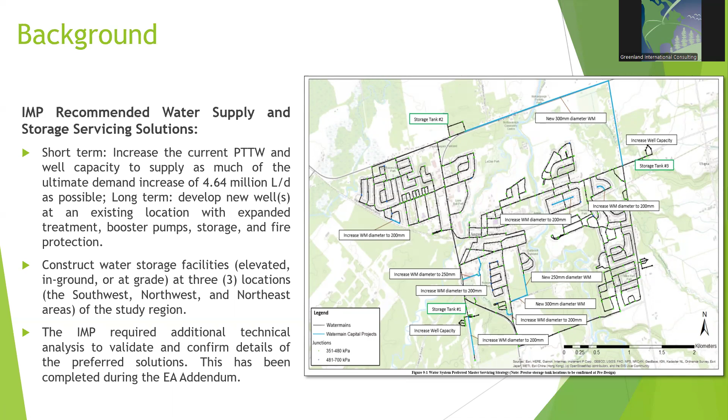Okay, so the IMP required some additional technical analysis to validate and confirm the details of the preferred solutions. So this was the main purpose of the addendum. So again, we're trying to prioritize and validate the water supply and storage strategies to address the immediate growth demands in Angus. And throughout this study, we revisited and reevaluated the IMP water supply and storage solutions by incorporating new data, field studies, and concept designs to help facilitate effective implementation.

So, as part of this addendum, we conducted additional investigations to assess well capacity and determine feasibility for ultimate build-out. And we also assessed the appropriateness of the different water storage solutions, so in-ground versus elevated tank. And we again looked at multiple tanks versus single tank solution within the context of some additional field work to check the space that exists at the sites that we were considering. So the other main component of this study was to address the current servicing gaps in water supply and storage that I mentioned before.

So our problem and opportunity statement for the addendum began with the IMP. It identified water supply and storage options, acknowledging that no single solution was able to fully address the long-term needs. So this addendum was focused on prioritizing and evaluating the immediate water supply and storage strategies to support current and near-term growth. It also involved additional hydrogeological studies to assess the well capacity expansion. And we examined, again, different water storage solutions and attempted to confirm the pre-design and technical requirements that we weren't quite able to get to in the original IMP.

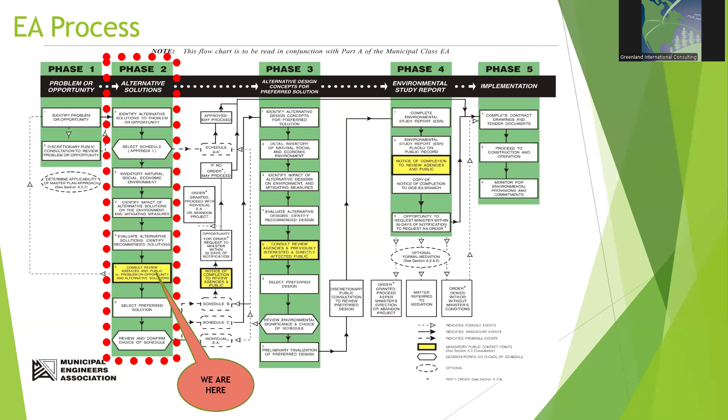So this is just a figure showing the EA process. We're in stage 2 of the process where we are going to public consultation. And from here, we're going to select our preferred solutions after implementing any comments or changes from the public process and finalizing our report to issue for a 30-day review period.

So existing municipal systems include about 62 kilometers of water main. There's 3 existing well sites, each with a pump station and reservoir, and a water supply residual capacity of roughly 599 equivalent residential units. And the water storage is currently beyond the 80% capacity threshold. So there's about 1,000 cubic meters of residual capacity, but we need roughly 5,000 right now just for the current

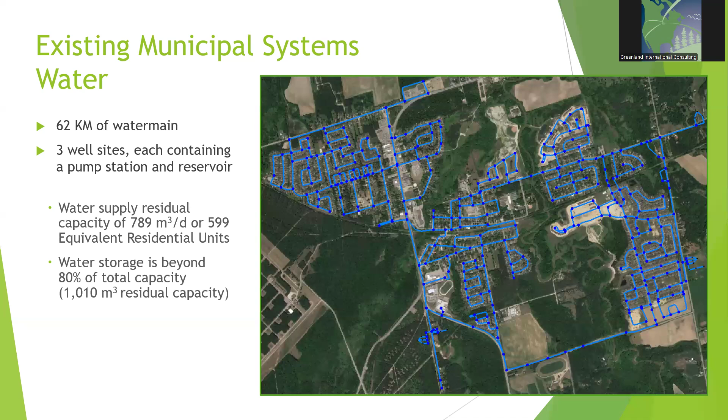population. So usually that 80% number is your trigger for an EA process. That's when you need to start looking at your new solutions. So that's part of why we're here today. So again, the ultimate water supply requirement is an increase of about 4,635 cubic meters per day, or 4.6 million liters per day. And the water storage amount that we need for future development to that ultimate population is about 4,200 cubic meters.

So again, this is from the IMP. We were looking at meeting a fire flow of 150 liters per second, which is in the current township standard for all areas, but that was found to be technically not feasible without some significant upgrades based on a lot of areas of town that were designed to a much lower standard of 37 liters a second historically.

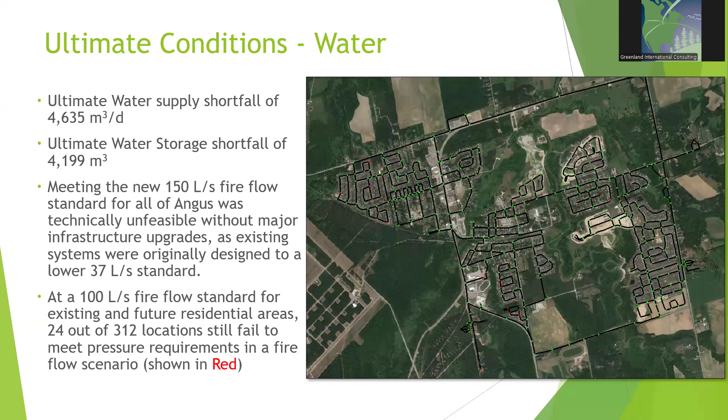So again, this is still coming from the original IMP. We were targeting rather a 100 liters per second fire flow standard for existing and future residential areas. And even at that level, there's failures of about 24 out of the 300 or so locations in our model that we're unable to meet that 100 liters per second fire flow. And just for information, everything still is beyond that original lower standard of 37. I think under this scenario, the lowest one was somewhere around 45 or 46. So we still have that grandfathered minimum, but we need to improve things here.

So our evaluation process, this is just a rundown of that. We looked at a number of different detailed impacts for each of our shortlisted alternatives and ranked them against each other in relative terms in terms of these criteria here. So the first one was natural environment impacts, which includes impacts to vegetation, wildlife, the natural environment, and surface and groundwater quality and quantity impacts, which is an important thing to consider certainly for water supply when we're looking at groundwater options here.

So we also looked at social, cultural, environment impacts, which include land use, archaeological considerations, requirements for complicated intermunicipal agreements and infrastructure, visual landscape and aesthetic impacts, as well as interruption to residents primarily during construction, as part of our considerations. And then on the technical operational side, we looked at the difficulty to construct or implement options relative to each other, and operation and maintenance efficiency.

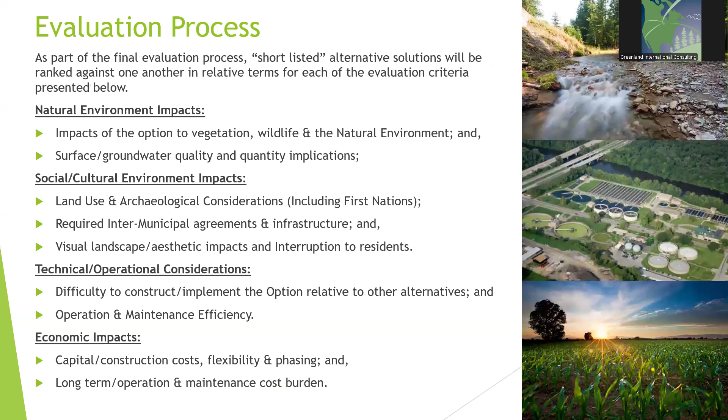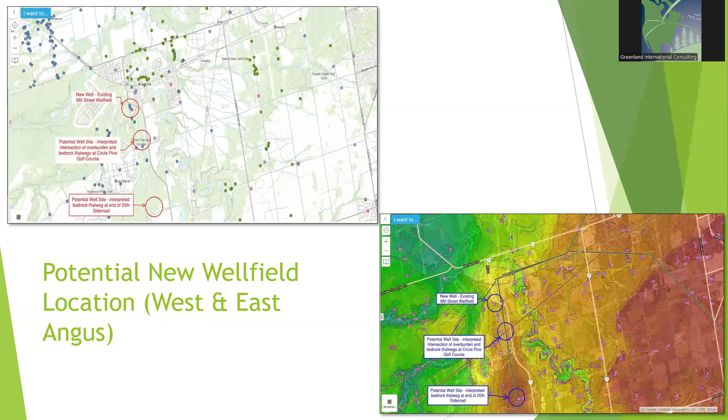The ones further south of Mill Street are not currently used for water supply, so more significant investigations would need to be done there to verify those sites. As well as at Mill Street, we would need to do some flow testing and other tests to confirm the viability of that option. No pumping tests were completed as part of this addendum, but any that are required were considered in the evaluation.

So again, this table just gives a summary of our short list of water supply options, so you can see the differences between the different supply options as far as the liters per day that we imagine could be provided. The one that was closest to getting us to that 4.6 million was this option of a new well 1A at Mill Street, which was again subject to some field testing and pump testing to confirm somewhere in the ballpark of potentially 4.4 million. So we're pretty close there.

And again, this modeling wasn't completed as part of the original IMP, so it was good that we were able to flesh this out a bit. We've also got the timeline to approval for each of the different options. They're all pretty similar, within a few months of each other.

But the capital costs vary quite a bit, and we also looked at the costs from a dollars per meter cubed of water supply perspective, because that's an important metric to consider here, rather than just the capital cost. And as you can maybe deduce from the numbers here, option W5 came out ahead on that metric. So we'll see more about that in the detailed evaluation.

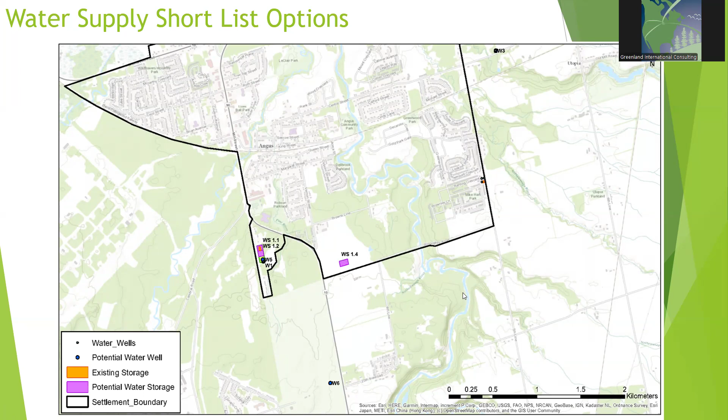Again, this is just a map showing where those shortlisted options are located. So you can see the Mill Street well, and we also showed where the storage is in this figure. So this is our detailed evaluation table for the water supply options. We did a color-coded approach here. Certain impacts are rated a little more highly than others. So I believe on the water supply side, the environmental impacts are evenly rated.

The main one that's different is, oh, sorry, having trouble here. On the economic impacts, for example, the capital cost was rated slightly higher than the other two options. But overall, I believe environmental impacts were 30%, social cultural were 20, technical operational were 20, and then economic was 30. So that's effectively how it was broken down.

And again, just on this, the comment I made before about the return on investment for water supply on a per meters cubed per day basis. You can see option 5 here is $506 per cubic meter per day of supply, whereas some of the other options are in the 2,000 to 3,000 ballpark. So quite a bit more expensive per meter cubed of supply. And again, I'm not going to go through all the details of this evaluation. The color coding gives the high level breakdown of it.

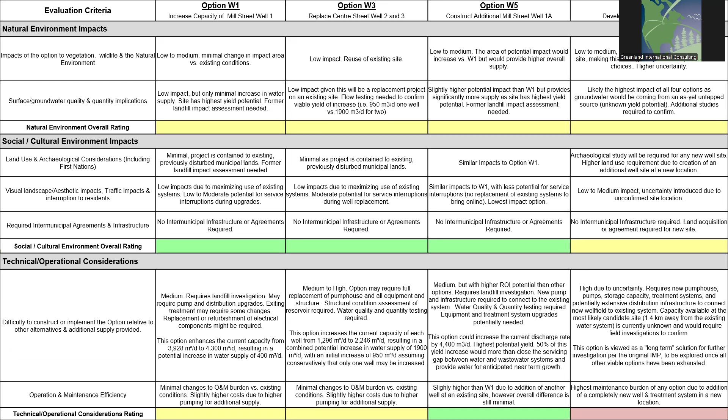The most complicated option was developing a new well field at a new site, simply because there's a lot of investigative work and agreements and so on that would need to be done in order to verify that option. And given the promising nature of our Mill Street option, it doesn't seem reasonable to pursue those costs at this time. So beyond that, increasing Mill Street well 1 itself could potentially get us the rest of the way.

But if that's not possible, then we may need to look at replacing Center Street. However, if we can get that substantial amount of flow from a new Mill Street well, then those options are going to be quite far down the road if they do need to be explored at some point in the future. So again, our preferred option involves a phased approach, but option 5 is considered our highest priority immediate solution based on this evaluation. And again, all these slides will be online.

So that takes us to our water storage options. So option 1 was to provide storage at a single location, option 2 was to provide it at 2 locations, and option 3 was at 3 locations. So the locations we looked at for these options, again, are from the original IMP evaluation. This was based on some modeling that was done fairly high level.

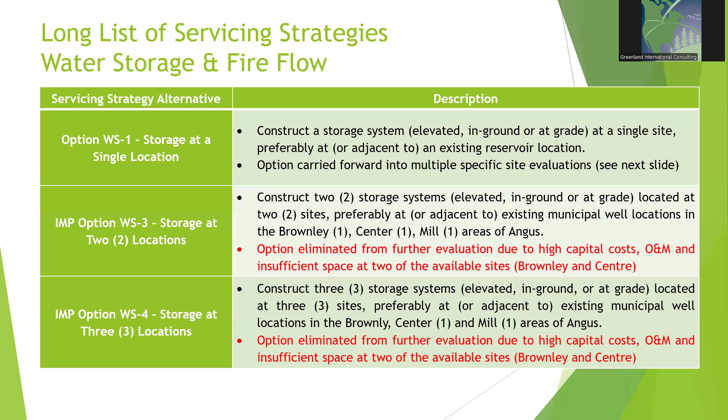So again, here's the breakdown of all the options that were explored under this subcategory of using a single storage system. We applied the screening to this, and there were some significant challenges both from space and economic perspective. As you can imagine, building 2 or 3 water towers or in-ground storage is going to be a lot more expensive than just building one that's suited to the long-term growth.

So as part of this evaluation, after we screened out the multiple site option, we went to 6 different options for single site water storage. The first of those was in-ground storage at Mill Street, expanding the existing reservoir. The second option was constructing an elevated storage tank at Mill Street. Third option was elevated storage at Brownley. Fourth was new storage at a greenfield site, as yet to be determined, in the south of Angus, and a new greenfield site in the northeast of Angus.

And we modeled both of those options for good measure, just to see how it would affect the required upgrades of water main to get to that 100 liters per second fire flow. And finally, we looked at storage at Center Street.

So again, the Center Street and Brownley sites were eliminated just due to the insufficient space at those sites from our field evaluations. And the new storage in the Northeast was eliminated because it was very similar to the South Angus option, but with a number of additional challenges and limitations, both technical and land acquisition wise. So it was eliminated, but we did keep the WS-1.4 option greenfield in for the detailed evaluation.

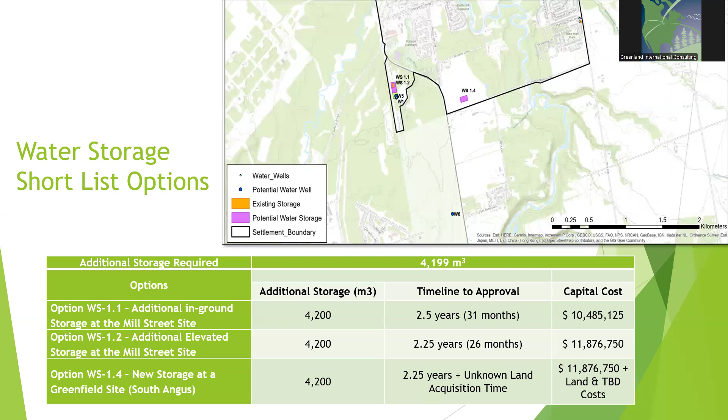The in-ground storage at Mill Street was 31 months. The elevated storage was about 26, and the South Angus option was a bit unknown, likely the same time for construction as the Mill Street option, plus an unknown amount of time associated with land acquisition, and also cost associated with the land was different. So the in-ground storage option was a little bit less costly than the elevated storage option, as you can see here too. And this is our overall evaluation table for the three shortlisted options on the storage side.

So again, the servicing strategy that won out here was Mill Street, and in this case, the elevated storage. There is a slight capital benefit on the in-ground storage side. However, the maintenance is a slightly higher burden and higher energy cost due to the pumping that would be required, whereas the elevated storage would provide some static pressure that doesn't require nearly as much of a pump burden to provide those fire flows because you've got that nice elevation providing pressure to the system for firefighting.

And again, the two Mill Street options were fairly similar in a lot of other regards. It was really the maintenance and the energy cost associated with the pumping of the in-ground reservoir that was the sort of make or break there. And the new site was less preferred, just again because there's quite a bit of unknowns in that situation. And the greenfield site would certainly require a lot more cost for land acquisition, for the studies, and the new sites were at least 1 to 200 meters away from existing systems, so you'd have that additional pipe work that would be required as well to connect to the existing water system.

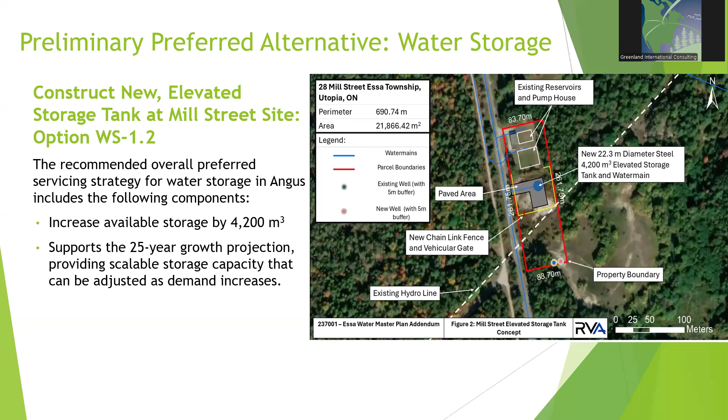So option WS-1.2 was our preferred option, which was the construction of a new elevated storage tank at Mill Street. And again, this 4,200 cubic meter solution would give us the full build out storage requirement. So we're not going to have to go in and build more storage at a different time at a higher cost. And just on the right hand side here, you can see sort of the conceptual site plan that was developed as part of the field investigations and concept designs that were completed for the addendum.

So overall, our preferred servicing option for near-term implementation was to increase Angus's water supply by the addition of this new well at Mill Street, which was option W5. We believe this option will provide approximately 4,400 cubic meters per day of additional supply, which would support approximately 1,600 new additional residential units beyond the current residual capacity. And again, that's subject to some wastewater improvements because there's currently that servicing deficit between the water and wastewater. And then the storage option that was preferred was, again, to construct that elevated tank at Mill Street.

And although additional supply options may be required for long-term growth, at this point those supply options are not suggested to be explored further, simply because they will have significantly higher costs. And later, when we know where we're at after implementing this option, it would be much better to begin investigating those if we need to.

So the next steps in the project are to incorporate any comments we have from this PIC and from agency circulations into the final concept option selection. Then we will finalize our addendum summary report and publish our notice of addendum. So that Class EA addendum report would then be placed on file with the ministry and township for public review for a period of 30 days.